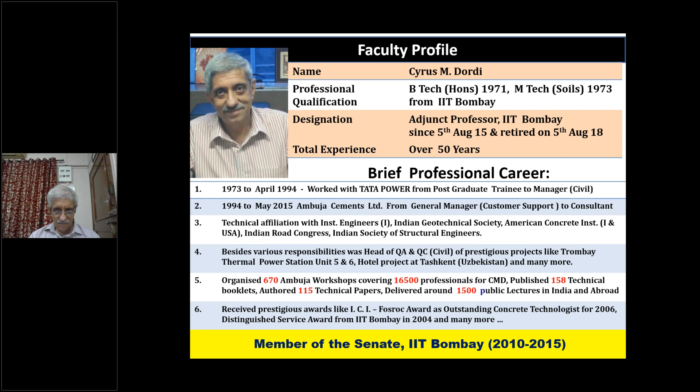Durability and sustainability are the keys to high performance concrete structures. This is a very interesting subject, relevant not only to site engineers but also engineers working in the ready mix concrete industry. Many a times I wonder why this subject has come out of late, because of the use of fine and ultra fine materials in concrete. We not only improve the environment by getting rid of this very important concrete ingredient, but at the same time we give durability to concrete structures, which have now come into being as high performance concrete structures.

Some years back, I was on a cruise from Barcelona back to Barcelona, and our ship was anchored at the Bay of Naples in Italy. Little did I know that the mountains which I could see from the window of the ship were the great mountains of Vesuvius, very famous for their pozzolanic material. In 79 AD, volcanic ash and pumicite, also called lightweight aggregate, containing almost 90% volcanic glass, were used as pozzolans to build the Roman Empire.

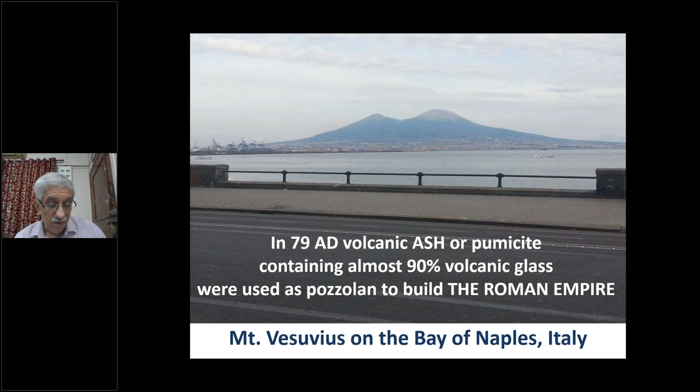Ultrafine and fine material have been used, as I told you, for over 2000 years, and this is one such structure called the Colosseum. The Colosseum was like a stadium built in Rome, having a capacity nearly that of the Wankhede Stadium in Mumbai.

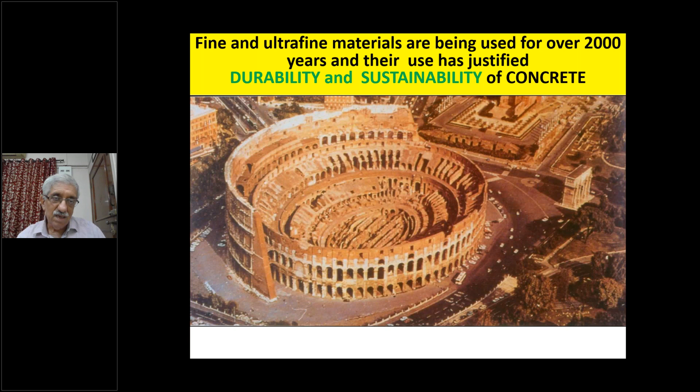The Colosseum was useful to the Roman emperor, who would punish citizens for not doing their job correctly. The punishment was simple: early morning the people would assemble, and the person to be punished had to fight a hungry lion with bare hands. If he was strong enough to kill the lion, he was forgiven of all his misdeeds. If not, he became a good breakfast for the lion.

Now let's see why concrete shows poor durability. There are many, many reasons; only a few important ones I am going to show you. The main reasons: poor specification and understanding of materials and concrete. So one has to brush up, learn, experience the feel of concrete in the field, and produce durable structures.

Poor detailing in the drawing. Very often details are not shown clearly in the working drawing received on site. The drawing should be thoroughly studied, including the notes written on it.

Poor quality control at site. I can talk volumes on that. This is an extremely important feature which is most neglected, unfortunately, by civil engineers and also by some civilians who have ventured into the concrete industry, thinking that it is not just civil engineers who can work with this material but even normal civilians can also do it. I think they are mistaken.

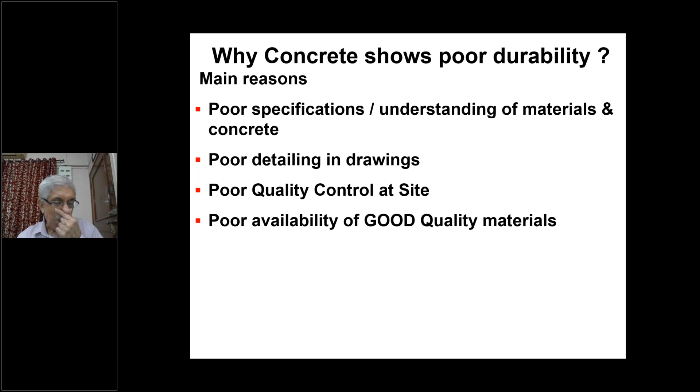Poor availability of good quality materials. When my career started in the construction industry, sand availability was a big problem in Mumbai. The quality was very poor, and we had to literally struggle to get good sand, or to convert bad sand into good sand.

Poor availability of easy testing methods at site. Most tests on durability are difficult to execute at the site, so we have to wait for years—25, 30, maybe 100 years—if the concrete survives. Without testing methods, we have only prescriptive methods: for example, if you use a low water-binder ratio or low water-cement ratio, you are bound to get durable concrete, but it has to be monitored properly at site.

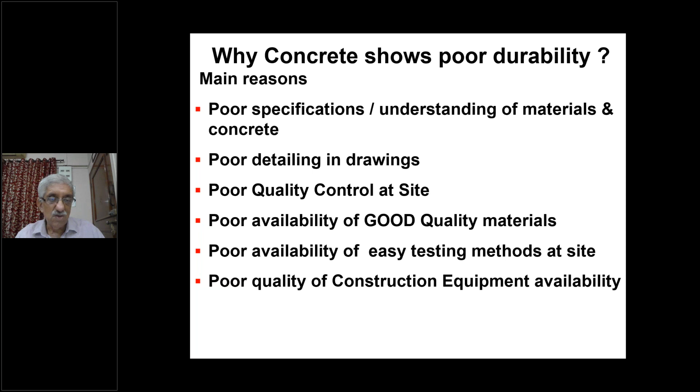Poor quality of construction equipment—but now the new civil engineering generation has ready mix concrete plants, so this problem is more or less solved. But even with a good plant and good quality materials, you must also have good supervision.

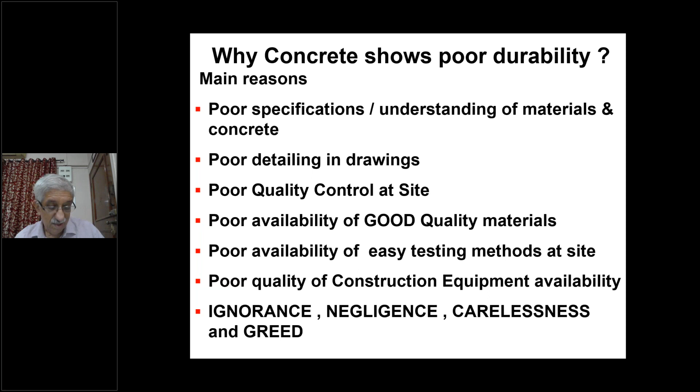Last but not the least: ignorance, negligence, and carelessness have to be removed from the minds of the constructor. If you are ignorant of the concrete material's properties and its existence, it becomes difficult to understand. Negligence and carelessness are the other two. But the last one, greed, I don't have to explain—there's plenty everywhere in the world. It's very important that a civil engineer should not have any greed, but it's difficult to find such human beings.

Now I'll quickly go through why concrete loses its durability. I'll click through these slides fast, otherwise it will take a lot of time. You can see various photographs here—generally concrete loses durability because in RCC we use steel, which is very vulnerable to corrosion. If proper care is not taken, corrosion occurs, and within a few years the durability of the RCC or concrete structure is lost.

The first important thing is that corrosion takes place when water enters and reaches the reinforcement inside the concrete structure. Chlorides cause corrosion, and for any reaction to take place there has to be oxygen—if there's no oxygen, corrosion may not take place and durability will be okay. Salt water penetration is most harmful because salt accelerates corrosion and causes serious problems. The steel gets converted to iron oxide, or rust, which expands and cracks the concrete, and further ingress of salt water and oxygen will completely deteriorate it.

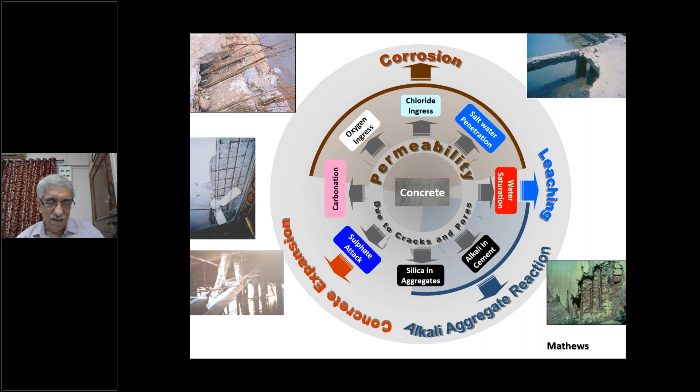So one has to make sure that the sulfate attack is minimized, and the best way known to engineers is to use pozzolanic material, slag, or maybe fly ash from a thermal power station. But essentially, these materials have to be good and produced in the right way so that they can protect the concrete and avoid the expansion due to sulfate attack. Again, ettringite is produced, which causes expansion and cracks in concrete.

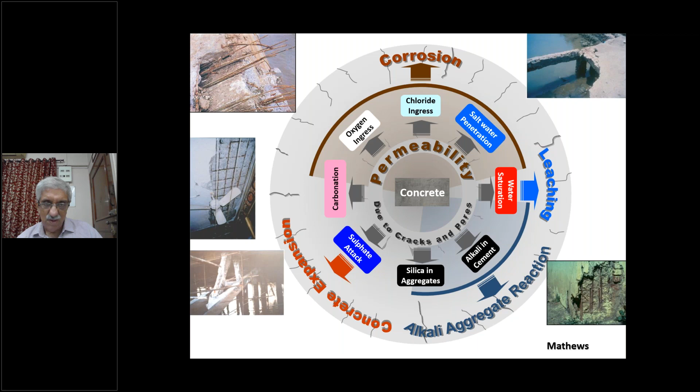If you don't make concrete properly, you will get cracks right from day one to the end of its life.

A little background on the materials, and I always explain the materials and give them an analogy of a human being. Now, there are plenty of materials which are used in concrete, so I am going to show you a rural family, not an urban family, because we can't have many children and produce bad quality concrete.

The first is the cement. Cement, I would compare with the head of the family. Thank God, in the early days of my career, we used to get only 33 grade cement, but now we get 53 and even better quality cements are available.

Water, I compare with the eldest son in the family, the Ladla Beta. Generally, we have observed that the eldest son is pampered the most, not the eldest daughter. Therefore, durability is lost if you have too much water in your concrete. One has to give priority to the water-cement ratio, as it is extremely important. Lower the water cement ratio, better will be the durability.

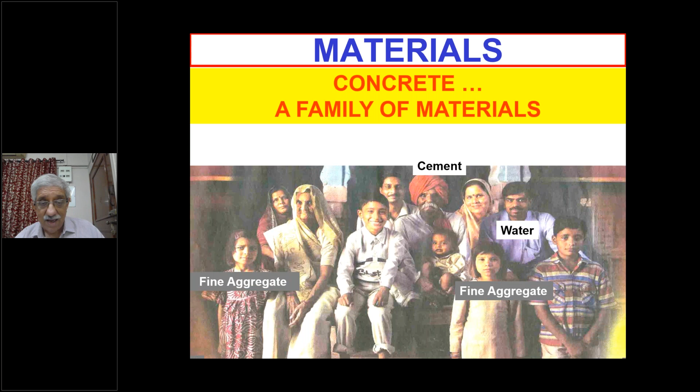Then we produce fine aggregates and coarse aggregates to be used in concrete. In India, unfortunately, we don't have standard aggregates. There are standards and specifications, but they are not easily available in the market unless the contractor takes it upon himself to produce standard aggregate. So we produce the aggregate in general terms, just like the children in a family, without much quality control, and therefore durability is at risk.

There are admixtures, high performance water reducing admixtures and others, and one has to have very good compatibility with cement and other materials used in concrete. In fact, each material should complement the other, and if they are not compatible, then you are in trouble. You may not get the results you are aspiring for.

Then comes the most important admixture, the mineral admixture, what we call slag, fly ash, ultra fine materials. All of them are classified, and I compare them with the mother-in-law in the family. Generally, it is seen that there is no value for the mother-in-law, she's become too old to do any work. But no, if she is encouraged to do the correct task in the family, she can make wonders.

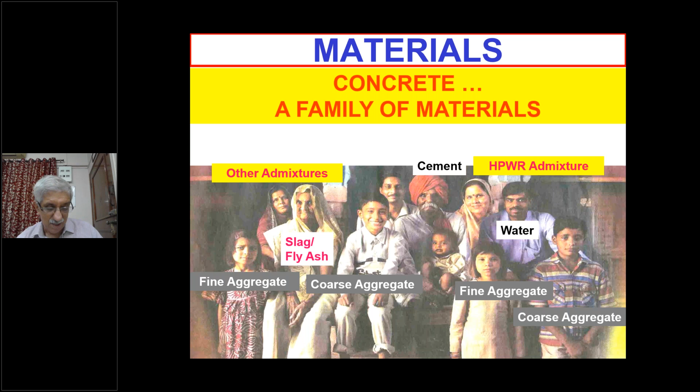Again, the choice of mineral admixtures is also very important. Not all fly ash or slag available can be used in concrete, they can produce adverse effects. Therefore, the material should have the correct specification so that it can be used as a pozzolanic material, and the full advantage goes to the structure.

Then of course we have other materials like fibers and ultra fine material. Ultrafine material performs exactly like the young children in the family.

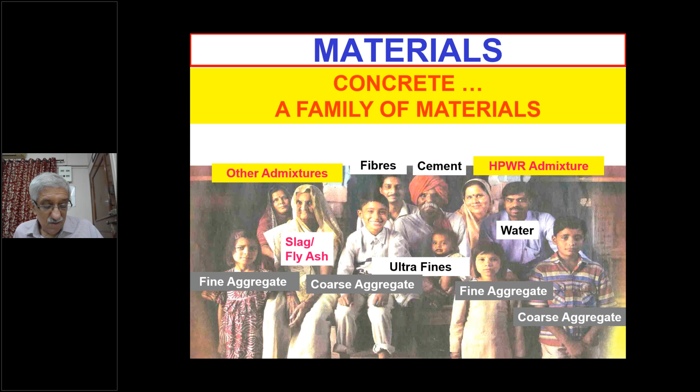They have to be carefully monitored and proportioned and used in concrete, and they can really work wonders. Generally, they should not be used in isolation. Ultrafines should be used with the fine material so that the mortar or binding paste we make for concrete is very solid, in the sense it can block all the chemicals from coming inside and harming the reinforcement, and at the same time give additional strength which cement itself will not provide. So consistency is the key of high performance concrete, and consistency is the key for the concrete also.

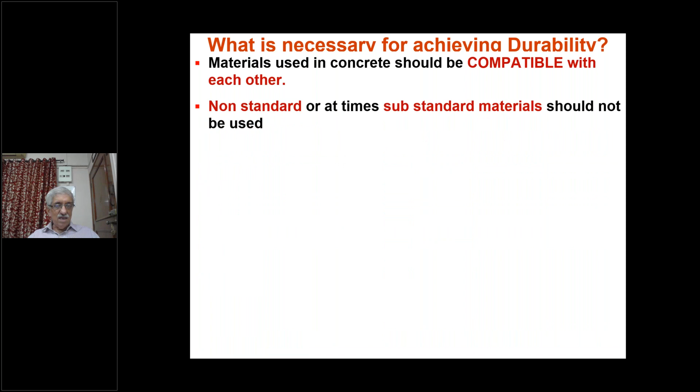What is necessary for durability? Material used in concrete should be compatible with each other, like family members in a family. Non-standard or at times substandard materials should not be used, like the aggregates or even the fly ash and slag. Materials used should be free from deleterious materials. So the deleterious materials either should be removed or materials containing them should not be used.

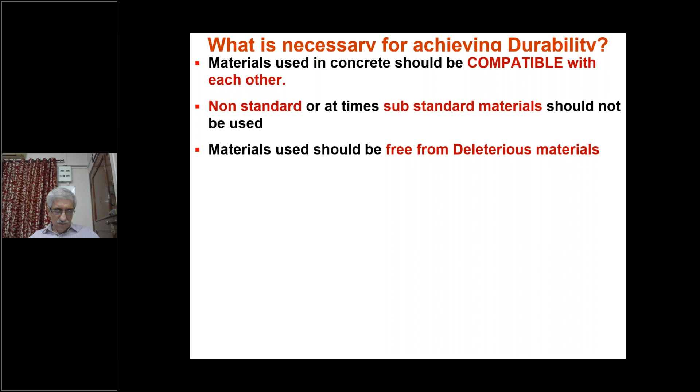In ordinary concrete mix design, we give importance only to packing of the coarse material. That means the bigger size aggregate goes with the finer size material, etc., and you get a nice compact skeleton of aggregates. But in high performance concrete, we should also give importance to the particle packing of materials in the binders. The cement is the coarsest binder, and the microsilica, or silica fume, will be the finest one. But there are others now available in the market, the ultrafine slag and the ultrafine fly ash. They are excellent packing materials.

We must give importance to the water binder ratio. Earlier we used to call it water cement ratio, but because now we are putting binders like slag, fly ash, ultrafine materials, etc., we call it water binder ratio. Lower the water binder ratio, better will be the concrete quality, as well as it will have good durability.

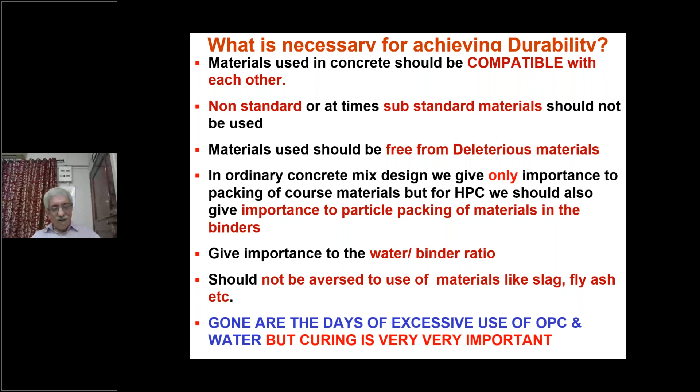Gone are the days of excessive use of OPC. These materials also help in reducing the cement content, not the cementitious content, and the water also. But last but not the least, please understand that curing is very, very important. People never understand that. Even today, on big sites, curing is the most neglected exercise of making concrete.

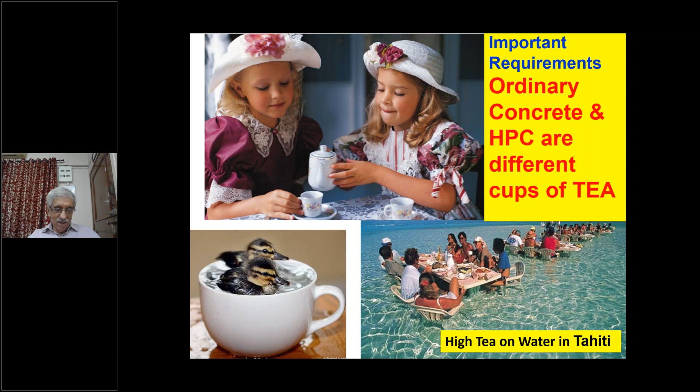Important requirements, just to compare ordinary concrete and high performance concrete - I am showing you this slide. Ordinary concrete is like ordinary tea; everyone can make it and drink it, but its performance is questionable. There are some special people who have high tea, on water in Tahiti, or some ducks can sit and swim in the cup of tea, and maybe we can have the non-vegetarian tea - not recommended.

Let us see how high performance concrete looks like. If you see high performance concrete, it consists of air and free water, about 2%. The hydrated paste will be about 35% by volume. The aggregates, considering fine and coarse aggregate totaling 100%, generally fine aggregates will be 40% and coarse aggregates will be 60%.

This is variable depending on degree of reaction between cement and water, so the binder ratio may change a little bit, and on exposure conditions. If we are having aggressive exposure conditions like the fluctuating wave at high tide and low tide, which gets alternate spray of seawater and alternate sunshine, it can be very vulnerable to causing corrosion on the steel.

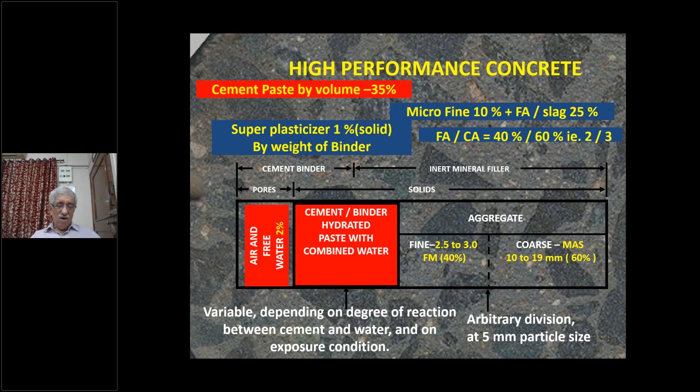Superplasticizer has to be always added by weight, not by volume. So it is very important to measure the superplasticizer, which often comes in form of a liquid, by the solid content. One has to first inquire with the manufacturer of the plasticizer how much is the solid content in the plasticizer, and that percentage you have to add, discarding the liquid which is added for convenience of adding the plasticizer to the concrete mix.

High performance concrete. Believe me, this material only came into being somewhere around 1970. And everyone was trying to change the philosophy of high performance concrete. Generally, when I started my career, I used to be very happy once I got the required strength. But I used to never bother about the durability.

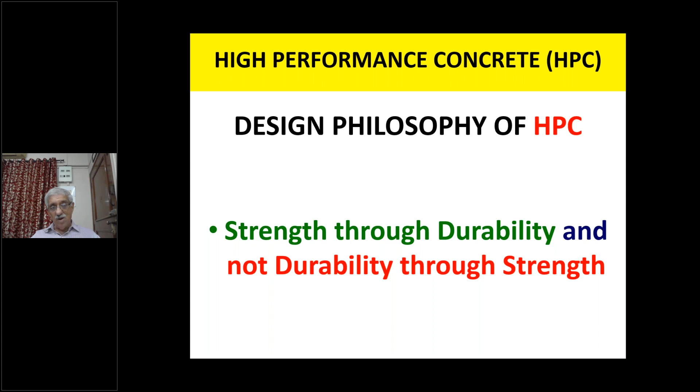This was a wrong concept in my mind. And when high performance concrete came into being, it was very clearly justified that strength through durability is a must, and not durability through strength. Means you should target durability, and not think that because you have got good strength, you will have durability in your concrete. This is a very important lesson I learned once high performance concrete came into being.

Even American Concrete Institute took a long time to define high performance concrete. And it came in 1998. Remember, I told you 1970, the concrete high performance concrete people were dabbling with.

So what is high performance concrete definition? Concrete meeting special combination of performance and uniformity requirement that cannot always be achieved routinely using conventional constituents and normal mixing, placing, and curing practices.

Mind you, what is important now, we do several steps while making concrete. So, of course, proportioning of the aggregates and all material is important. Normal mixers may not work. You have to have high performance mixers like the ones we get in the batching mixing plant of the ready mix concrete. Placing of the concrete has to be done correctly, because if you segregate the mix, you can't get dense concrete. And last but not the least, curing cannot be neglected right from the beginning. I will come to that in the last part of my lecture.

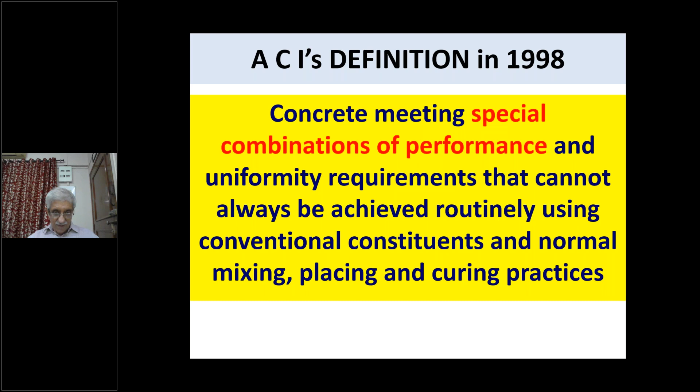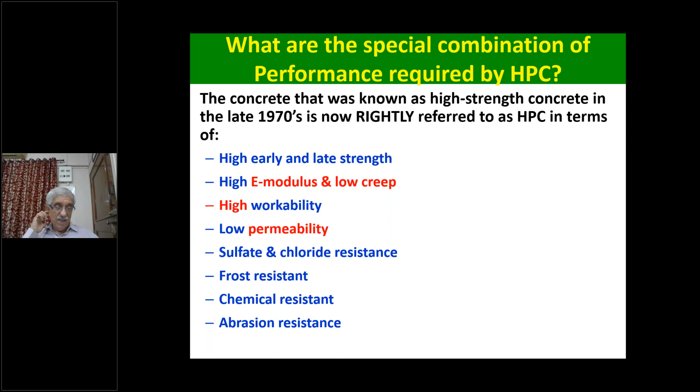What are the special combinations of performance required by HPC? Well, you can target high early strength or late strength, high elastic modulus and low creep, high workability. See, these are all the special requirements of high performance concrete. You may select one or two or maybe all. Sulfate and chloride resistance, frost resistance if it is done in very cold climatic conditions, chemical resistance, and abrasion resistance. Even you can make spillways of the dams where there is very high level of abrasion from high performance concrete.

Now, in high performance concrete, we are very sensibly using the fine and ultra fine materials like fly ash, slag, ultra fine fly ash, ultra fine slag, silica fume, etc., and packing the cementitious material. So when you pack between the cement particles with the cementitious material, after the complete hydration process is completed, there is hardly any water within the cement particles, and the whole thing has been transformed into a solid material. So if you have such a gel made and it packs the aggregates properly, you get high performance concrete.

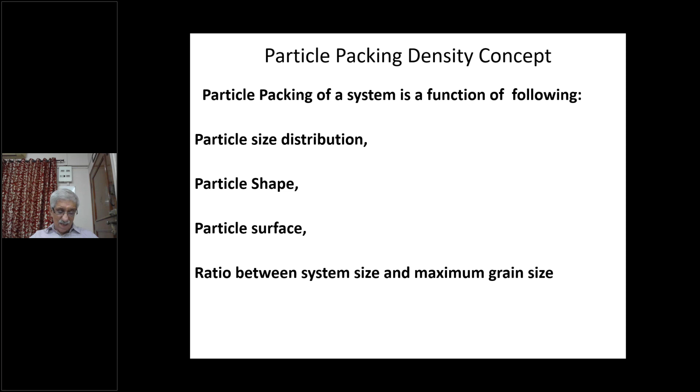Ratio between system size and maximum grain size - just like we select the maximum aggregate size, you want 10 mm downgraded concrete, or 20 mm downgraded material used in concrete, or even 40 mm. The ratio between the system size and maximum grain size is important, as is the presence of liquids, where they help in workability and compaction of the concrete.

Just to give you an idea of the various types as seen through a microscope. We had the facility to use the laboratories in IIT Bombay and IIT Chennai, Mumbai and Chennai, and you can see how OPC looks under magnification.

The fly ash, which is generally used in the RMC industry, has some coarser grains and some finer grains. The GGBS also, used in the RMC industry - one thing you must remember is that ultrafine slag is made by grinding normal slag, and when you grind any substance to ultra fineness, the shape gradually turns spherical, though not actually spherical.

Fly ash used in high performance concrete - you can use different sizes of fly ash together in high performance concrete, quite unlike the fly ash generally used in the RMC industry.

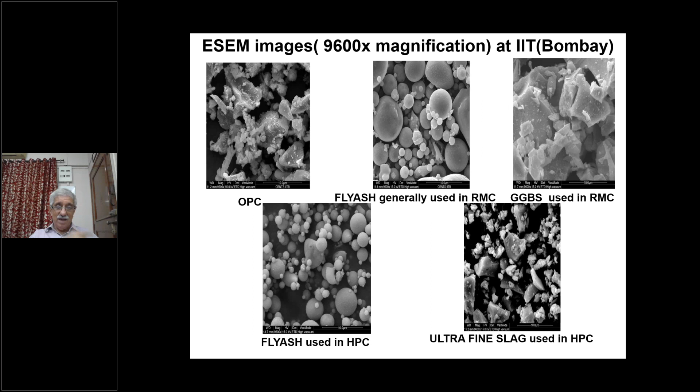Now everything we do in the mix design has to be linked with the specific gravity of the material, especially when you are designing the proportion of cement and the other ultrafine material. In IIT Bombay, we had the facility to use the pycnometer.

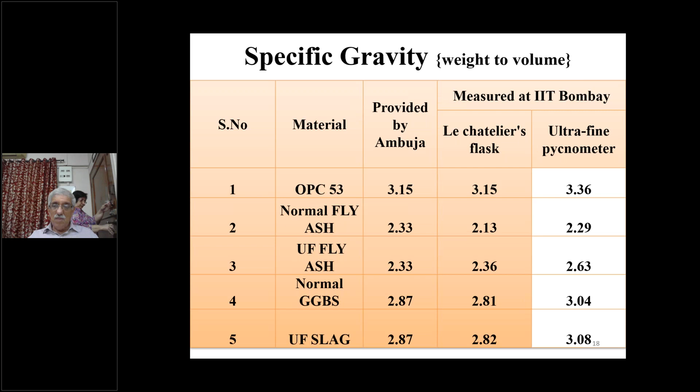Using the pycnometer for ultrafine material gives much more accurate specific gravity than the Le Chatelier's flask. But that's a matter of how accurate you want to be. We have found that if a pycnometer is not available, you can also do with ultrafine materials using the Chatelier's flask - but the pycnometer gives you more accuracy.

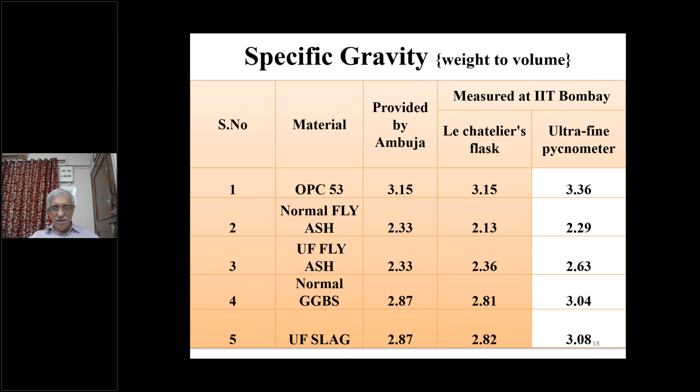The Puntke test, or Punka test, first came into being many years ago when people added fly ash to cement and called it a binder. So water which is added to the dry binder, blended materials, or dry fillers in combination, fills the voids between the particles, as I showed you in that sketch, and acts as a lubricant to make the material compact efficiently.

Water which is in excess, after completely filling the voids, appears at the surface of the mix and indicates that now the material is saturated with water - that is the saturation limit.

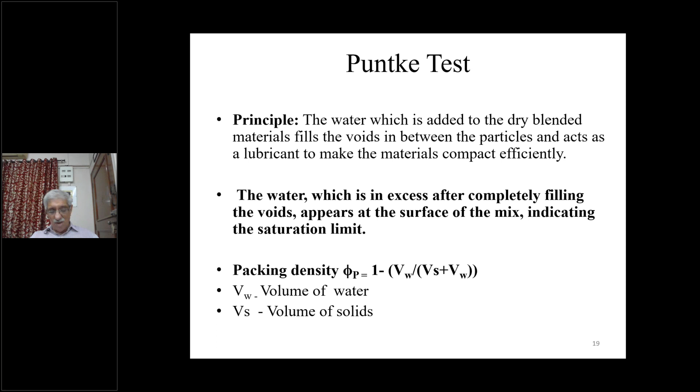Packing density is calculated by this formula, where VW is the volume of water required to be added till the gel gets fully saturated, and Vs is the volume of the solids. That's how we do this simple test called the Puntke test for packing density - very important.

Add water little by little, again mixing it till you see shining particles coming out, meaning the water is trying to come out of the fine material and the mix is saturated. At that point you must stop adding further water to the mix. This is a very simple, even crude, test, but it gives you an idea of how much should be the proportion of water in the binder combination.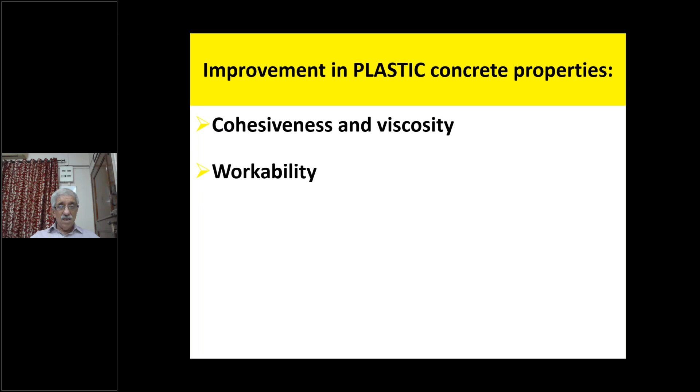The second is workability. You need a chemical admixture, but there is certain workability or flowability introduced, especially when using fine material like fly ash. Plastic concrete gets improved workability. Fine materials like slag and fly ash, and their ultra fine materials, help workability get retained for a longer time because fine and ultra fine material take longer to gain strength. This is good for pump concrete and transporting concrete, since compaction can be done even at a later time.

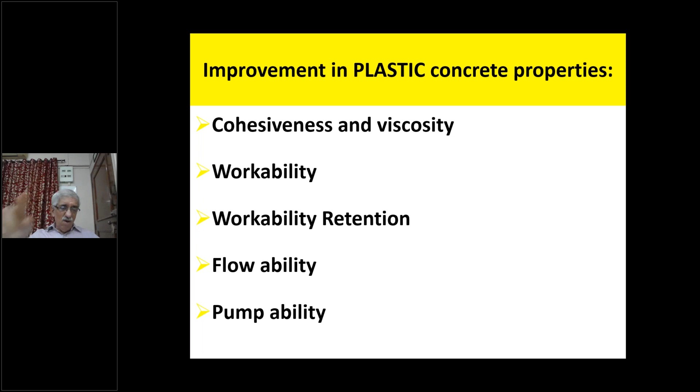There is a difference between workability and flowability. Workability means you can work with the concrete material. Flowability means the concrete flows like water. You must have seen flowing concrete that does not need compaction - it just flows like water, but does not allow the materials to segregate. Once you get all these things, your pumpability increases.

Sometimes we measure pumpability by slump cone, sometimes by the spread. This is one example from Kingkey Financial Center where they produced C120 high performance concrete. The initial spread was 610 millimeters, and the slump was 270 millimeters. After 4 hours, the retention was 590 millimeters of the spread, and the slump dropped to about 40 millimeters.

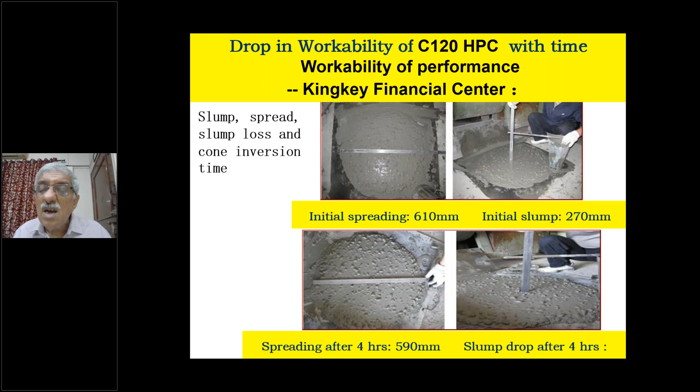Improvement in pumpability is due to fine and ultra fine material, which forms a good lubricating layer on the internal pipe surface. Imagine you are squeezing the concrete while pumping - the pressure is applied from behind by the pump, and resistance is offered by the roughness of the pipe, so the concrete gets squeezed. When concrete gets squeezed, the paste comes out on the internal surface of the pipe and lubricates it. Therefore, it is very important that fine and ultra fine material is used - it improves the lubrication layer, so the pump does the pumping without difficulty.

It also reduces wear and tear of the pump line. Remember, when we did unit number 5 in Trombay Thermal Power Station, the aggregate used was gravel, and to some extent admixtures were used. In the other project, unit number 6, we could not get gravel aggregate, so we had to use crushed aggregate. Immediately the wear and tear on the concrete pump lines increased because they were rough, and probably we were not using fine and ultra fine material at that time. Otherwise, it would have protected the pipe by not allowing the rough edges of the aggregate to get in touch with the pipe and cause abrasion within it. So it is a costly affair - we had to change the pipes more frequently than in unit number 5.

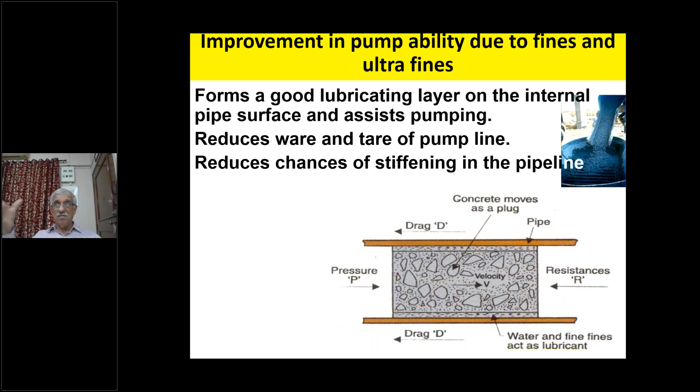Another benefit is it reduces the chances of stiffening in the pipeline. If there is a problem with the pump or batching plant and supply is not there, you can still wait for some time and give a gentle stroke every 10 or 15 minutes so the initial viscosity is not there, and when you resume pumping it will cause a smooth flow.

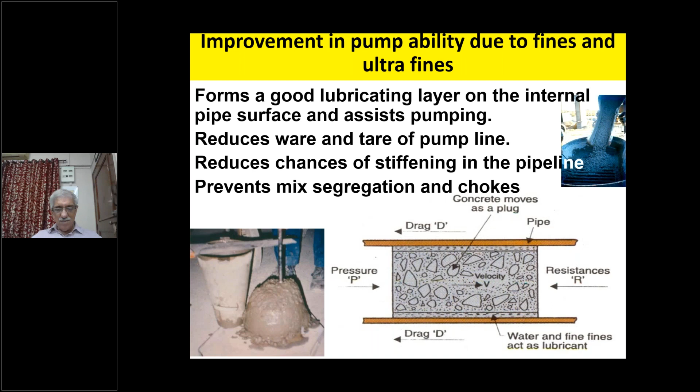This prevents mix segregation and chokes. What happens if you notice choking of the pipeline while pumping? There are two things you will notice. One is that the aggregate has formed a choke - the cementitious binding material required is not present. This can happen when there is segregation or a high level of fluidity in the mix; the finer material, due to the pressure of the pump, has vanished or got removed, leaving only aggregate forming the choke. The other possibility is that the entire concrete is intact, and the whole concrete itself has choked the pipe. This can happen due to low workability and greater stiffness in the concrete mix than necessary, or flowability not being present in the mix. So chokes can happen, but can be avoided by correctly using the concrete materials and other ingredients in the mix.

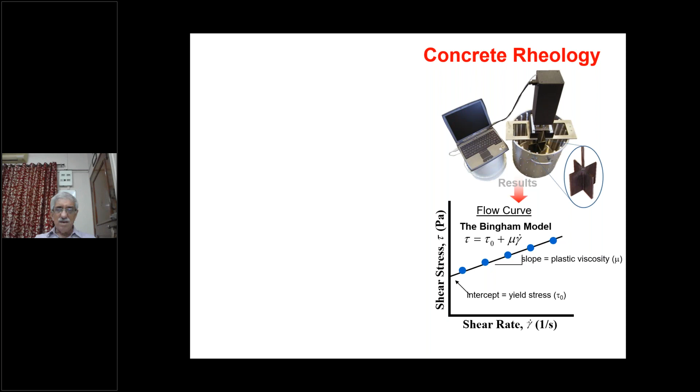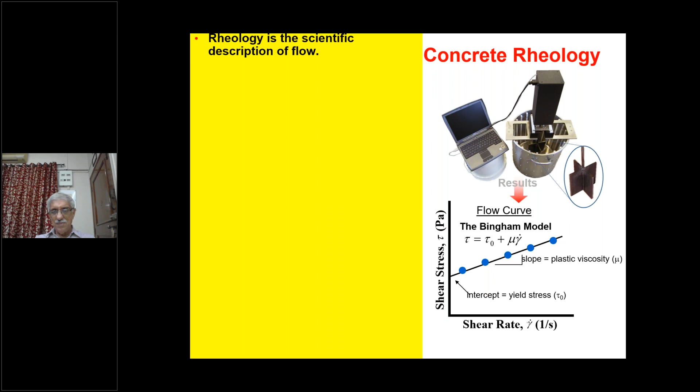Concrete rheology is studied in many places, and this is called a rheometer. Rheology is a scientific description of flow. We are not interested now in workability, slump, and so on - we are interested in the flowability of the mix in the pipe. The rheology of concrete is measured with a concrete rheometer, which determines the resistance of concrete to shear flow at various rates.

Initially, the concrete has to break the friction between the pipe and the concrete being pushed through it, and therefore the initial yield stress is important. Later, once the concrete has broken the initial yield stress, it will flow again. Concrete rheology measurements are typically explained using the Bingham model - a function of yield stress, which is the minimum stress to initiate or maintain flow, related to slump or spread, and plastic viscosity, which is the resistance to flow once yield stress is exceeded, related to the stickiness of the mix and surface. Shear stress, yield stress, and plastic viscosity are important to measure the flow curve.

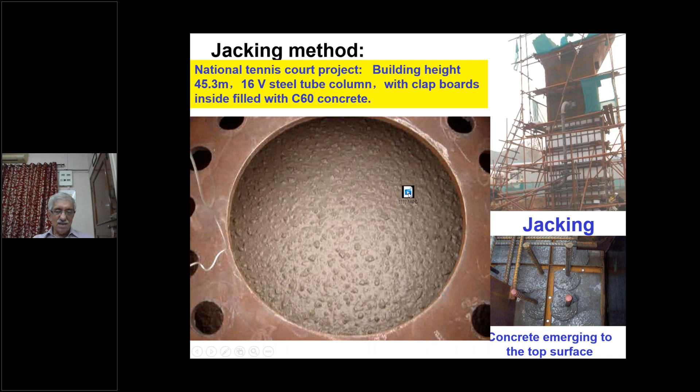Concrete rheology provides many insights into concrete behavior. Slump and slump flow are functions of concrete rheology. This is very important. I will show you one example - this is reverse pumping, where from the bottom, concrete is pumped into a fountain, and this is the flowing concrete. Sorry, I have to go.

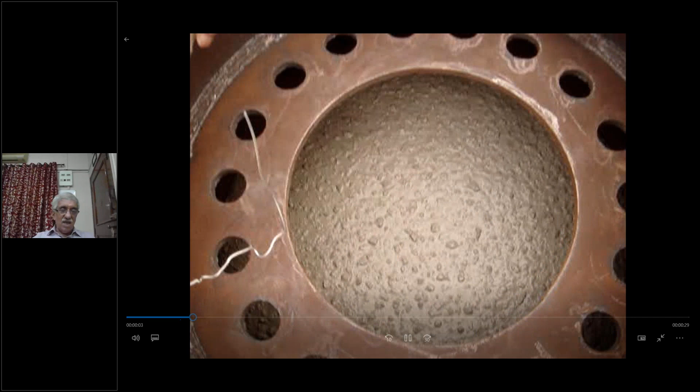This is jacking of concrete. See how the concrete is rising. Now it has reached the top and it will overflow. Ting in Chinese language means stop, stop, stop.

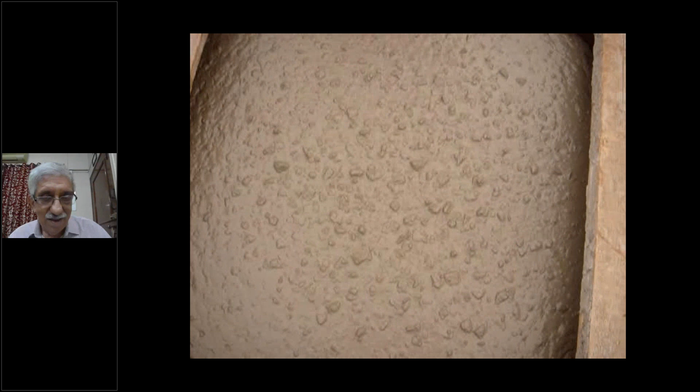So you also learn Chinese language, because this video has been taken in China where they were constructing a tennis court columns and doing this reverse pumping of C60 grade concrete.

Yeah, absolutely. Ah, thank you.

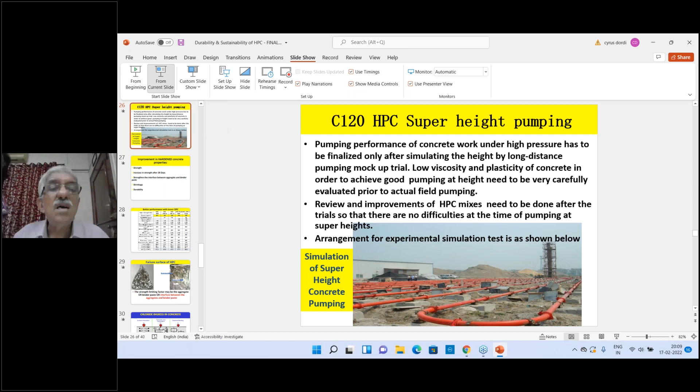Now, C120 high performance concrete for super height pumping. This was being done when this building was being constructed in China, the financial center.

Pumping performance of concrete work under high pressure has to be finalized only after simulating the height through a long distance pumping mock-up trial. Low viscosity and plasticity of concrete in order to achieve good pumping at height need to be carefully evaluated prior to actual field pumping. This is very, very important, and see how they do the simulation.

Instead of putting a pipe vertically up, they have lots of bends and horizontal length of pipe, which is equivalent to the height of the building. There is a conversion table available. Roughly one vertical, 1 meter long vertical pipe equals to about 2 to 3 meter long horizontal pipe, because of lesser friction.

Vertical means more power is required. So once you have done the mix design, you have to try it out with this type of an arrangement and see whether the concrete will flow to the required height in actual pumping.

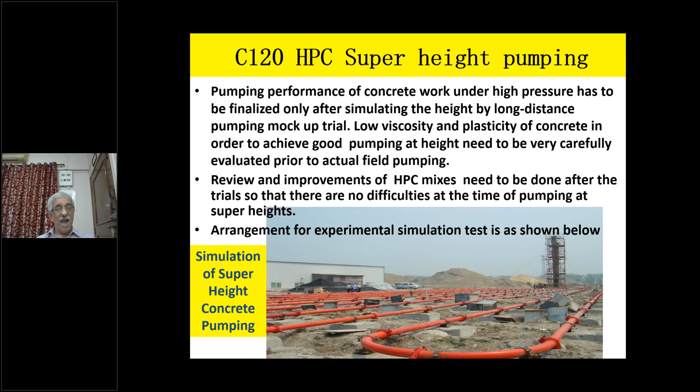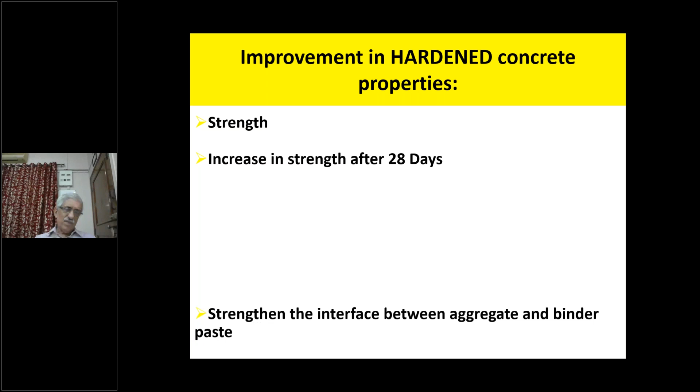Strengthening of the interface between the aggregates and the binder. You must have observed that when you crush a cube, the failure of the cube takes place, one, as a result of the aggregate itself getting crushed, or as a result of the paste getting stressed and cracked.

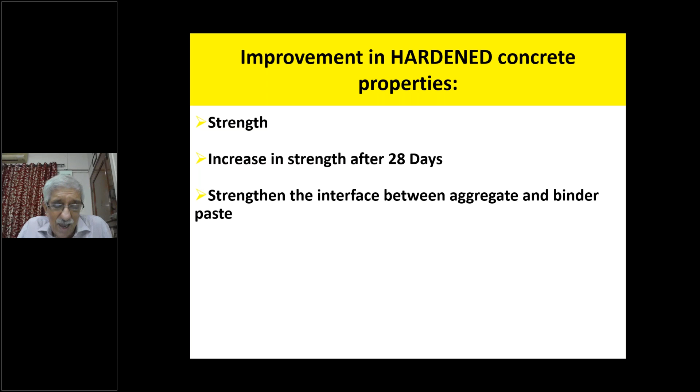Most of the failures of the cubes are at the interface. When you do concrete testing of M60 grade and more, then it is very important that you have to strengthen the interface between the aggregate and the binder paste. Otherwise, you won't get such high strength. And the interface between the aggregate and the binder paste is strengthened due to use of fine and ultra fine material in the paste.

Shrinkage reduces like anything, because now you have removed the water and replaced it with a dense gel, which will harden and reduce the chances of shrinkage due to loss of water from the mix.

Naturally, durability improves because your mix is now hard and strong and also gaining strength.

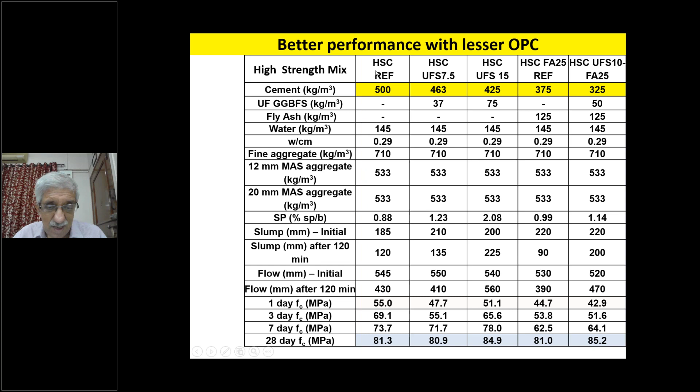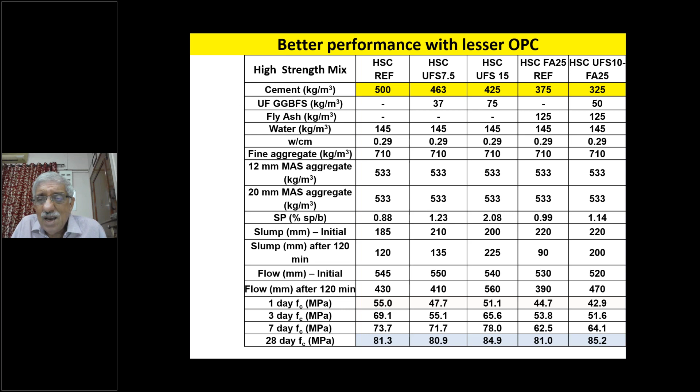I'll give you one example which we did with different mixes, and the first mix was a reference mix. Only cement was used. The second mix was using ultrafine material, ultrafine slag 7.5%. The third mix, ultrafine slag 15%, and then only fly ash 25%. The last one is ultrafine slag 10% with 25% fly ash.

Now all of them had cement content varying from 500 to 325. This was the least, because we have used both fine and ultrafine material, and the strength was the best. This is getting hidden, but it was about 88 or so, 85 or 88, I think.

If I click this, then there will be a problem. Anyway, so the strength was best. With only 325 we could get...

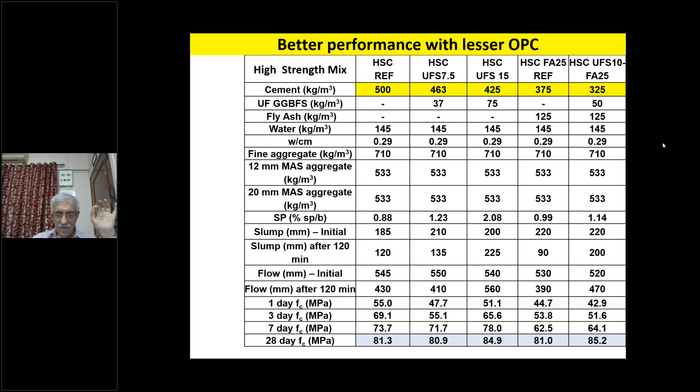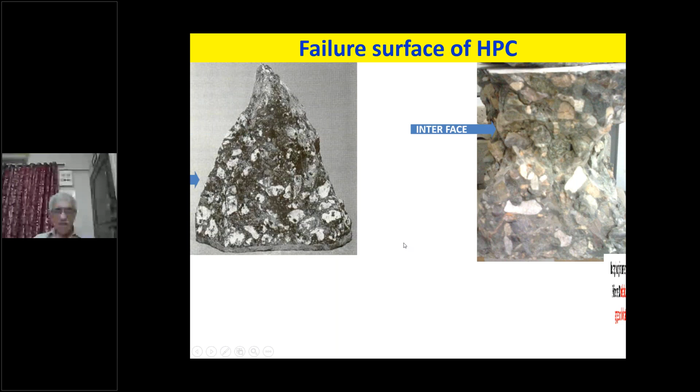So interface has to be strengthened, and if the aggregates are also failing, then aggregates have to become stronger or get a better source to give you higher strength aggregates. But generally, the interface, if it is strengthened, you can exceed 60 to 80 to 100 megapascal strength.

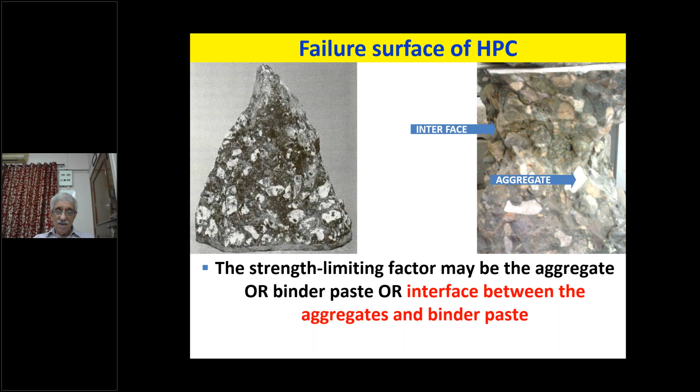The strength limiting factor may be aggregate, binder paste, or the interface between them. So here, if you are aspiring to do 100 grade concrete, then of course the interface has to be strengthened.

Chloride ingress in concrete. This is a very simple way to show how it affects. The first is surface adsorption of chloride.

If chloride ingress is there in concrete, some of the chlorides will get absorbed due to the anodic attraction by the hydrates, and it will take a little longer to reach the steel when there is low water to binder ratio.

It's important. The next is the tortuosity and the permeation of chlorides. Now, tortuosity can be higher when you are using mineral admixtures in binary blending, meaning both coarse and fine mineral admixtures together.

It is like the pores will be having tortuosity, and with the proper packing or proper mixing of the binders, it will have more tortuosity, so the water or the chlorides will take a longer time to reach the steel.

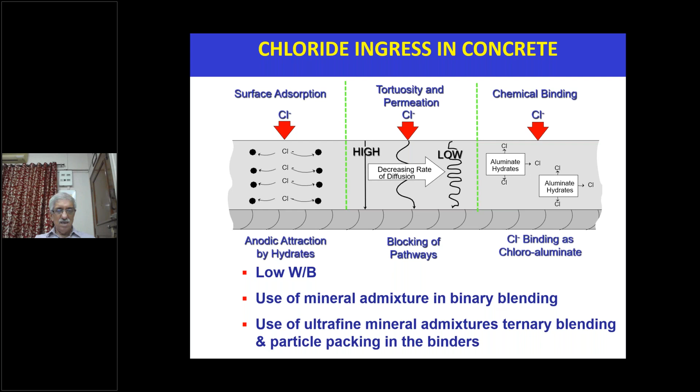The only disadvantage of high performance concrete is fire. This is a photograph taken of the Euro tunnel when it was constructed. The liners are made out of high performance concrete. And you must have heard of a fire taking place within very few months of the tunnel being commissioned.

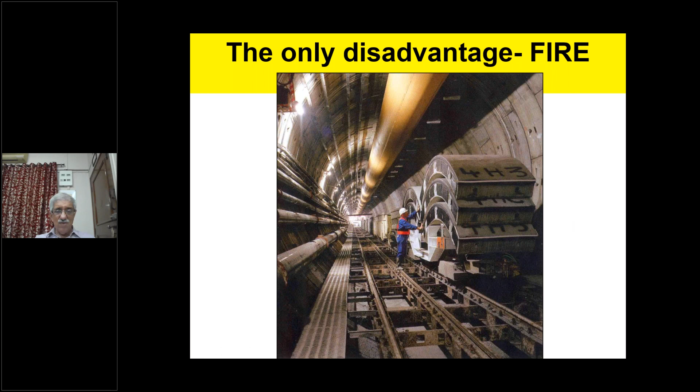The temperatures went up to 400 degrees centigrade. Inside the tunnel the heat was much more, it was not an open fire where heat could get dissipated. And under the rapid heating condition, cracks appeared on the surface.

When the high strength concrete is crushed, bursting takes place because steam generated by the fire is not allowed to easily come out of the concrete, which is being crushed.

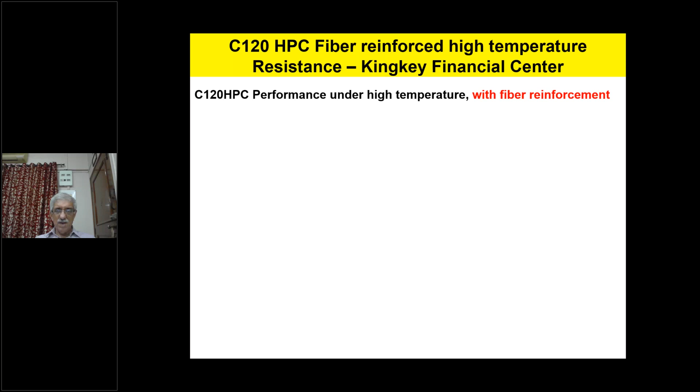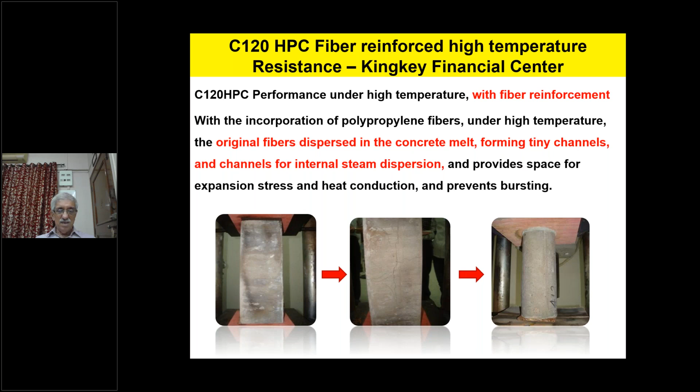So now a method has been developed where you put some fibers, reinforcement fiber, in the high performance concrete, so that in case there is a fire, the fibers will melt and not allow the concrete to burst. The steam will let go very comfortably and no bursting can take place, and bursting can cause serious injuries to workers who are present very close to the concrete surface.

High performance concrete is now in use extensively due to the advantage of high strengths. What are the advantages? Contractors will certainly like it. Reduction of concrete content by 40%, this will be the client's dream. Reduction of steel component by 39%, because now the concrete can take a lot of tension. Reduction of construction cost by 20 to 35%. Everyone will like it.

If we are replacing 40 megapascal by 80 megapascal concrete, then reduction in volume of the structural member will be higher. Static load is reduced by 30% in the design. If 60 megapascal is replaced by 150 megapascal, reduction in column cross section and increase in beam span, overall reduction in cross sectional area and increase in building usable area.

Now what happens is, when the World One was being constructed in Mumbai, they were also in lookout for M100 grade concrete. And the experience was very less at that time in India. And the client had to visit places here and there to find out the solution.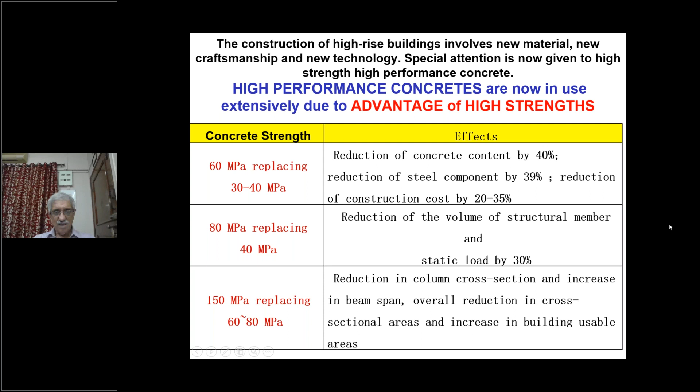Ultimately, they had to fix the design in a very scientific way, complying with all the requirements of high performance concrete, and they landed up with around 98 megapascal strength, and at the same time could get enough access at the ground floor level. The building is now completed, people can go and see that.

Last thing, curing. High performance concrete must be cured quite differently from usual concrete. The use of curing compound has no value in inhibiting autogenous shrinkage. Generally, curing compounds are used so that they inhibit autogenous shrinkage. But in this case, when the concrete is very high strength, it is strongly recommended to do wet curing and not use curing compound.

The wet curing can be done for the first 2 to 3 days of placement and finishing, and later on you can continue doing curing with curing compound.

Contractors must be specifically paid to cure concrete. It is a profitable investment because otherwise it will not be possible to have high performance concrete if wet curing is not resorted to in the first 2 to 3 days.

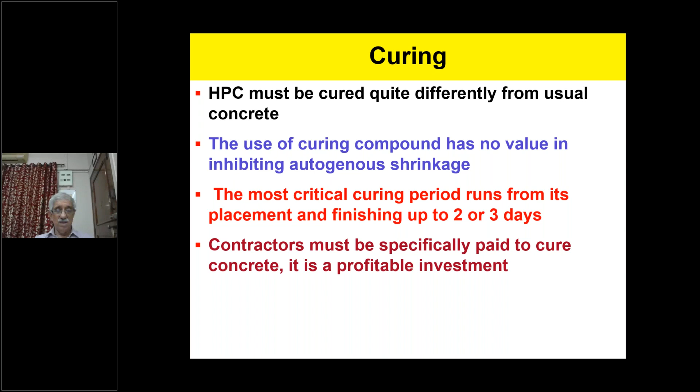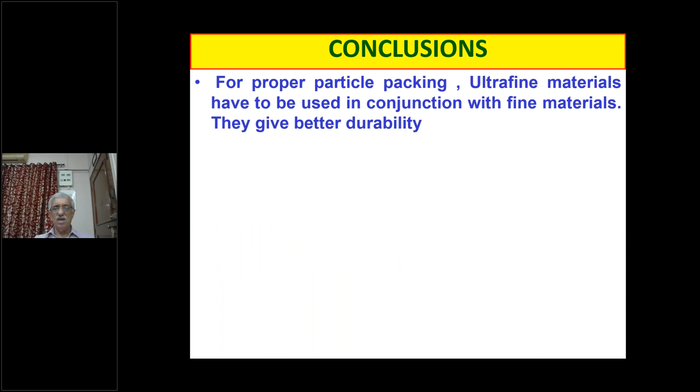Conclusions. For proper particle packing, ultrafine material has to be used in conjunction with fine material. They give better durability. Shape and size and particle size distribution of the fine and ultrafine material play an important role in workability, cohesiveness, pumpability, flowability, and strength.

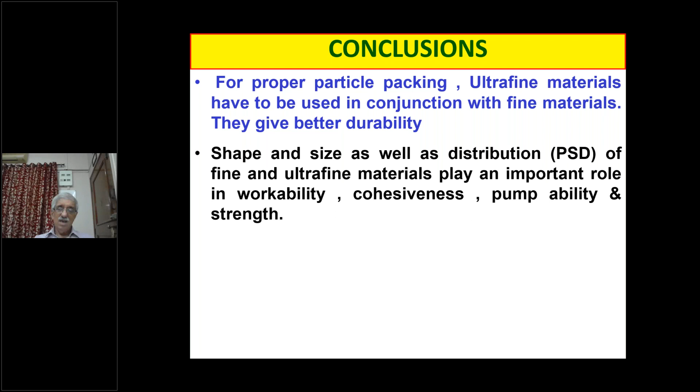In high performance concrete, fine and ultrafine material play a very important role in strengthening the interface between the binder paste and the aggregate. If particle size distribution is identical, lime and pozzolanic reactions play a key role in strength. So this point is to be borne in mind.

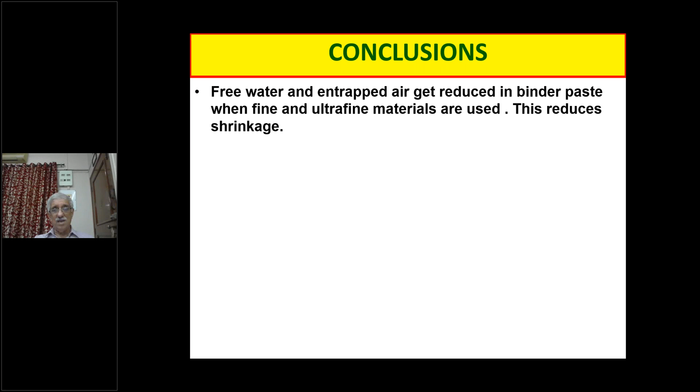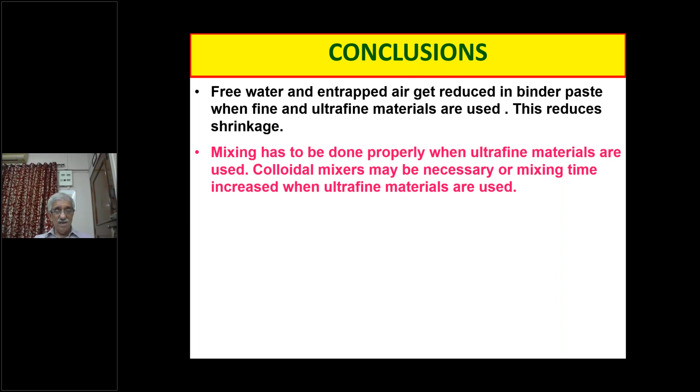Free water and entrapped air get reduced in binder paste when fine and ultrafine material are used. This reduces shrinkage and cracking. Mixing has to be done properly when fine and ultrafine materials are used. Colloidal mixers may be necessary, or mixing time may need to be increased when ultrafine materials are used.

Chloride saturation test. Now, generally, the underground railway systems, underground trains, etc., are recommending that RCPT test has to be done. But chloride saturation test is the only authentic test for chloride penetration, not RCPT. ISO only recognizes the chloride saturation test. So please don't waste your money and time doing RCPT. You must do the chloride saturation test. Maybe it will take a little longer, but it will be the correct test.

Durability and strength are greatly enhanced if fine and ultrafine materials are used in the correct proportion in concrete.

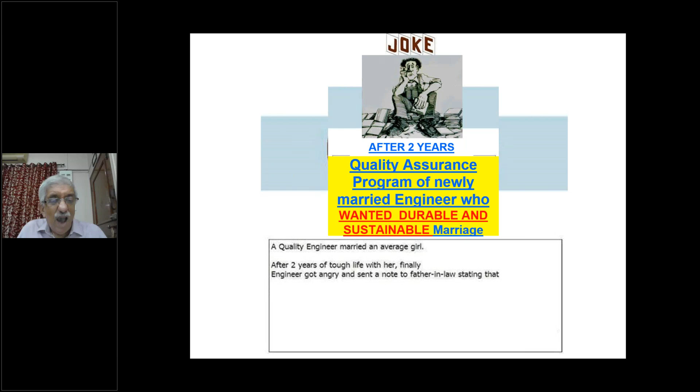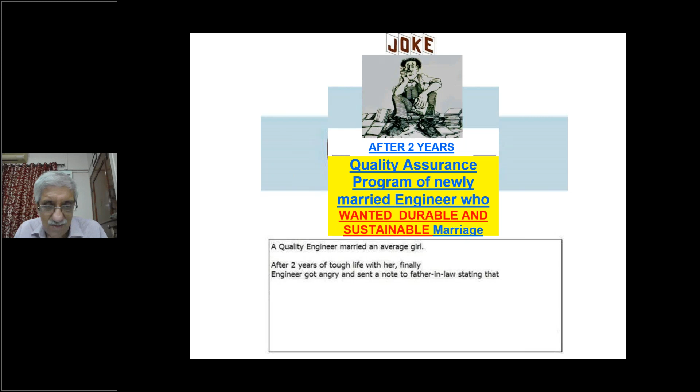Now I end my lecture with a joke. A quality assurance program for a newly married engineer who wanted marriage to be durable and sustainable. So he was very happy with a big broad smile at the time of his marriage. After 2 years, he was in trouble. The quality engineer had married an average girl. After 2 years of tough life with her, finally the engineer got angry and sent a note to his father-in-law stating—these days they send faster notes, email bhi bhej sakta hai—'Your product not meeting my requirement.' The clever father-in-law replied, 'Warranty expired, manufacturer not responding,' because he had given only a 1 year guarantee for his civil works, and therefore he is not responsible.